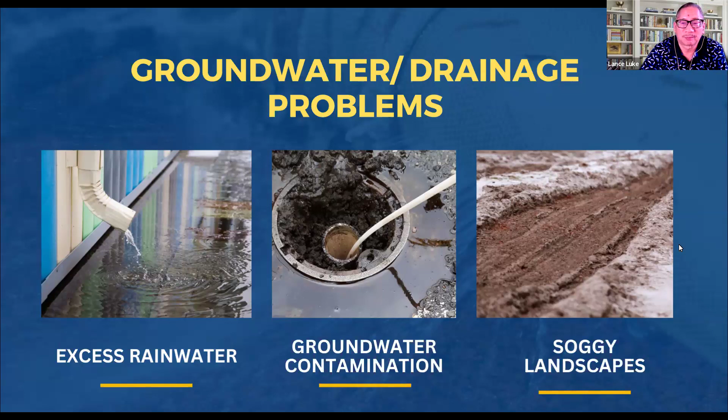Then excess water could contribute to foundation damage. If you always have water against the foundation, you could have cracks or erosion on concrete, or wood rot if it's wood, leading to mold or mildew. You could have insulation in the walls get wet, which is no good -- even if it dries out, it just doesn't function like new insulation. And then too much water, you have some soil erosion. When you have too much soil erosion under your house foundation, your house could be moving from that.

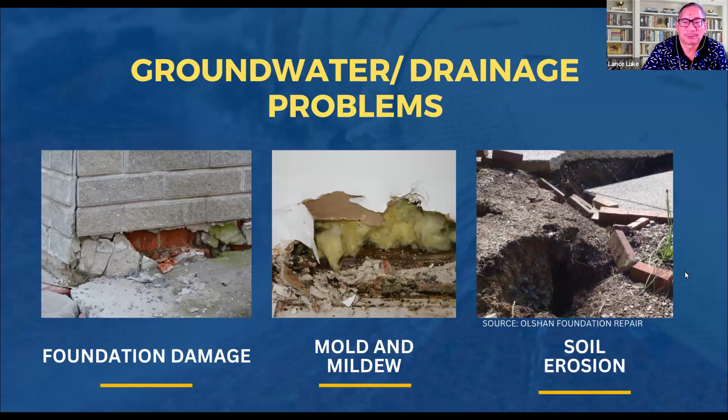Some more issues: flooding of roads, and then overflow off the road leads to basement flooding. Not too many houses have basements, but even if you don't have a basement, if you're still low to the ground, a house or building could be flooded. I know a lot of condo buildings where we had hurricanes and floods, their first floor lobby got flooded out.

And then you have water quality issues where you could have contamination of your drinking water, or contamination of streams or rivers, and these streams or rivers lead to the ocean. I'm talking about Hawaii here mainly. So in Hawaii, if the stream or the river is contaminated, guess what? It goes out into the ocean, and then part of the ocean gets contaminated.

But the situation is getting worse and worse. And then you have legal issues, regulatory compliance regarding groundwater drainage. That's why you cannot wash your car out on the road and let the water drain into the gutter, into the storm drain. Believe it or not, that's not allowed.

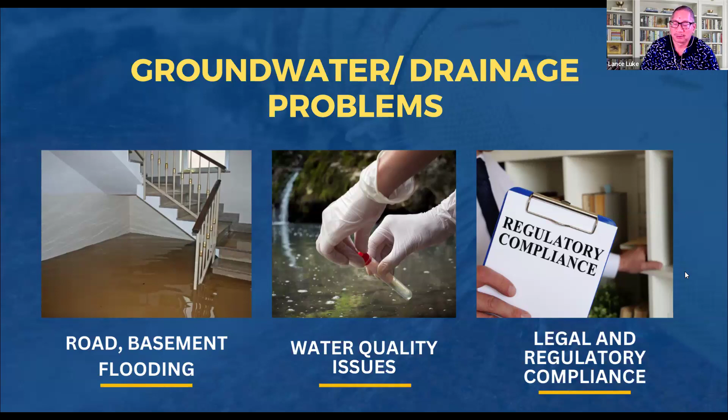Also, painting a building. The painting company cannot pressure wash the building and have all that excess water drain out into the gutter that leads into the storm drain. There's huge fines for that. So we're talking about environmental concerns.

And then let's talk about plumbing leaks. It's pretty common. You have pipe leaks. It could be a fixture that's leaking. It could be an appliance, such as a water heater, where it gets too old and starts corroding and develops these leaks. A water heater could be leaking for some time, a couple months or even a year, where it develops a slow leak, and then all of a sudden it turns into a huge leak.

That's a serious issue, especially if you're in a condo. Let's say you're on the 21st floor, and the guy above you doesn't replace his water heater and it starts leaking. You're gonna know pretty fast when you have water dripping down from your ceiling that there's a leak. That's why we always try to spread the word and tell people don't wait until it gets bad. If you see a lot of corrosion around your water heater or you see some water, have a plumber come out and check it. Most times he's going to recommend that you replace it because you cannot repair corrosion on a water heater.

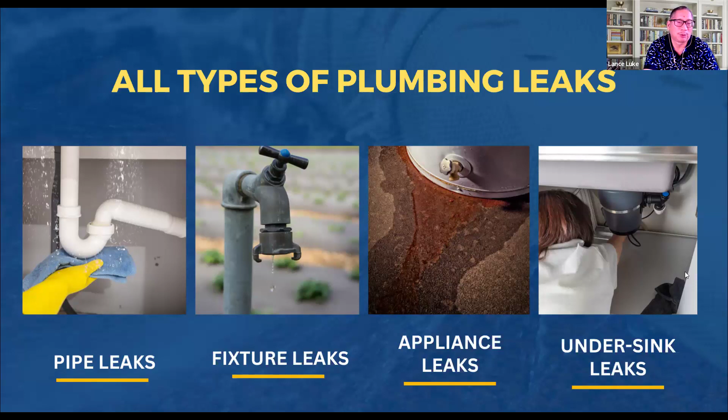There have been cases where in a high-rise condo, the guy down below says, 'Hey, I got water dripping,' and he knocks on the door of the condo unit above him, and the guy goes, 'Oh, there's no leak in my bathroom.' He doesn't know that because the pipe is inside the wall and it's not visible to the unit owner. So these are things to be aware of.

Some other types of plumbing leaks are sewer line leaks, which is not the best kind of leak. You could have a concrete foundation slab leak, and we say it's a slab leak, but it's actually not. It's water that's coming underneath the slab, the foundation slab, and going up into the slab and then appearing on the inside of the house. That is common when you have piping located underneath your house foundation.

So the difference between house construction: you have a concrete slab and then you have a raised foundation, and there's room under the house to crawl under there. There's also another type which is a basement foundation, but that's commonly on the mainland and not really in Hawaii. And then you have a roof leak, which is not a plumbing leak, but this is an exaggerated photo. And on the mainland, you have frozen pipes that crack or burst, because the water inside the pipe freezes. That's more of a mainland or country area that has freezing temperatures.

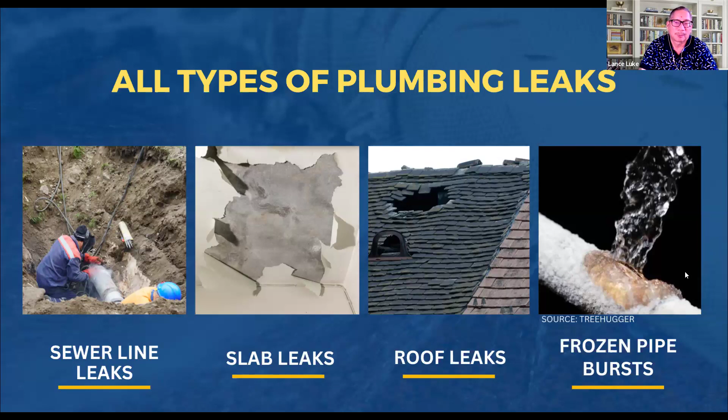That photo of a roof previously should be on this slide, but somehow it got mixed up. But roof leaks of various types: you got weather related, such as snow. We don't have too much of that in Hawaii. Aging, wear and tear on your roof, causing the roof to leak if you don't attend to it right away. You could have flashing issues and then also ice dams building up.

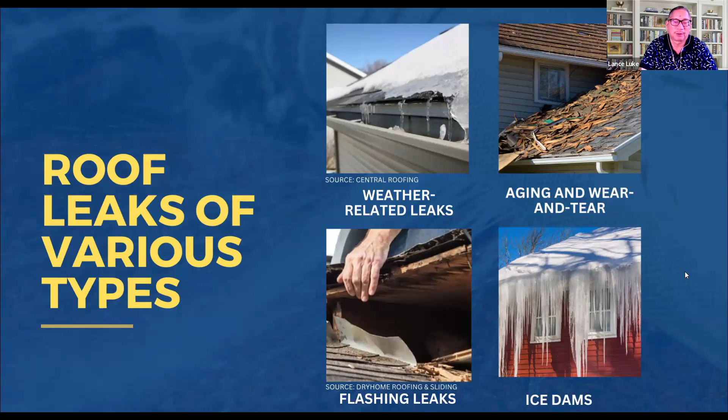So the key here is you want to get your roof fixed or inspected and don't wait until it starts leaking. If you get roofing contractors come to your place, it doesn't matter whether it's a house or you're living in a condo building. Contractor comes out and he can tell you, yeah, your roof is not performing as intended, and I think you should replace it or have it repaired. So you get an opinion from professionals. And sometimes with the opinion, the people don't listen, and then there's other issues that come to play.

In a commercial building or apartment building, most times the roof is flat, so you could have a floor drain on top of your roof that gets clogged. The objective is you've got to make sure your roof is inspected. In a condo building, you're not going to go up on the roof yourself, so you ask the building manager or resident manager when was the last time they checked the roof, and to report any problems. When they check it, they should fill out an inspection report and take pictures so we have documentary evidence of the inspection and any repairs needed.

If you live in a house or condo building, there may be skylights and exhaust vent leaks at your vent or skylight, common to single family houses and townhouses. A lot of townhouse buildings are actually condos and don't have flat roofs necessarily - they may have skylights and vents. You want to be sure the vents are all sealed at the base, the flashing. That's normally the area where it would be leaking.

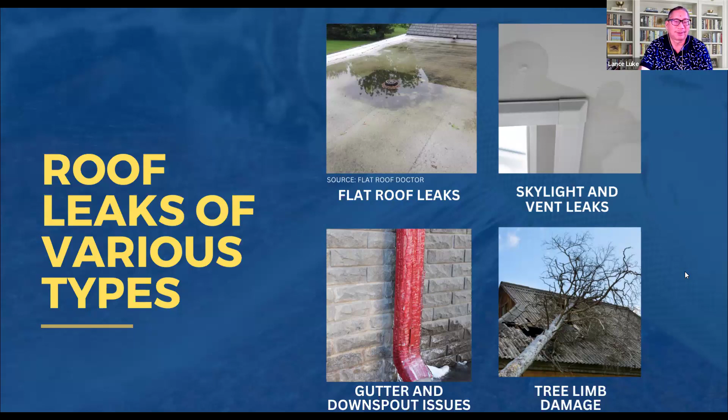And then you may have an act of God kind of thing, like a tree falling onto a roof. If the tree has been dead for a while and it's close to the house and you don't do anything about it, it could be an accident waiting to happen. That's where insurance may come in, but they may ask how long has this tree been here, how long has it been dead, and can't you see it's a 50-foot tree located 30 feet from your house - if it falls over, the tree is higher than the distance to your house. This is what happened, so they may say it's your own fault for not tending to the problem.

Let's talk about window leaks. I'm not talking about jalousie windows where if you leave it open rain can come in, or a sliding window left open when it rains with heavy wind - of course water can get in then.

We're talking about weather-related leaks during heavy rain and driving force winds that cause rain to blow sideways. But that's part of the problem. The other problem is maybe the window has poor caulking, improper installation, condensation issues. If the building is old, aging, deteriorated, with wood frames, and the caulking's missing, water can easily get in at the joint between the window frame and the wall.

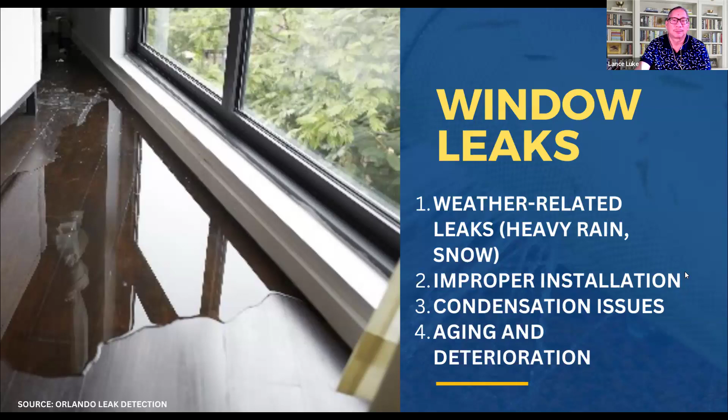Some more window leaks: sealant failure. You have this rubber gasket that goes around the window, located between the glass and the window frame. If that material gets warped or so old that it shrinks, it doesn't serve its purpose, so that's also a situation where water can get in. It's pretty obvious when we see that, or sometimes it's missing.

I've seen some houses where the gasket is totally missing, and I asked what happened to it. They said it was lifting up and too hard to clean so they just removed it. I said, do you know what the purpose was? You've got to put it back or get somebody to fix it. So sealant failure, caulking, gaskets, frame and sill damage - you want to make sure everything's watertight.

Leaks around your window - sometimes on the mainland they have these wells around windows. Just think about this: if you're outside your house with a garden hose shooting water directly at your window and the wall, do you think water can get in? If yes, then it's problematic. Now that's a single family house - can you imagine on a high-rise condo? It's the same concept.

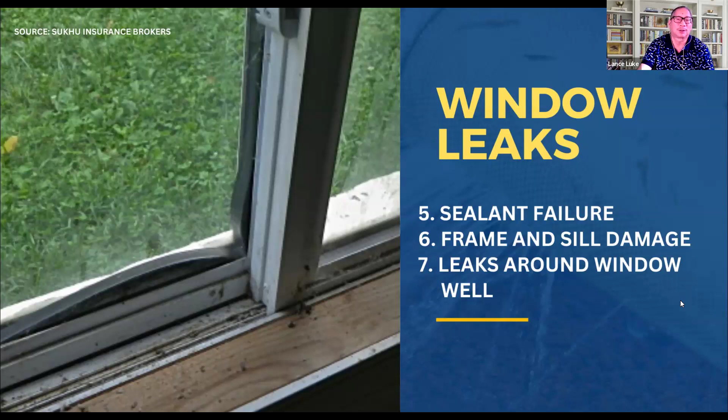Okay, so it gets kind of technical, but if it needs to be done to discover where the leaks are, then that's fine too.

How about exterior wall leaks? Weather-related leaks, heavy rain, wind, pounding hurricane force winds where the wind is so strong it actually causes the rain to blow sideways. So if you're outside holding an umbrella, you have no protection because the rain's coming in sideways. So that's what's happening at your house or building wall. And if you don't have paint to protect it or waterproofing, guess what? The water is going to get in.

It doesn't matter if your wall is made out of concrete, CMU block, wood, stucco material, or anything like that - water can still get in. On an exterior wall, the construction method uses flashing and caulking. So if the flashing is not done correctly or if it's worn away, that could be another condition for a leak. Cracked or damaged masonry, that's like hollow tile blocks or bricks, and sometimes the grouting cracks or just falls off. Now you have an open space there where water can get in.

And then faulty siding. In the past, there was wood siding that wasn't real wood - it was ground up, fabricated pieces of wood with other kind of chemical makeup, and it was fibrous. All those manufacturers got sued because their siding material used to get so warped and expanded when it was wet, and it basically disintegrated. It was like a higher level cardboard, so to speak. The brand name is like Masonite siding, LP, Louisiana Pacific, that type. It was all man-made - I would call it wood type siding.

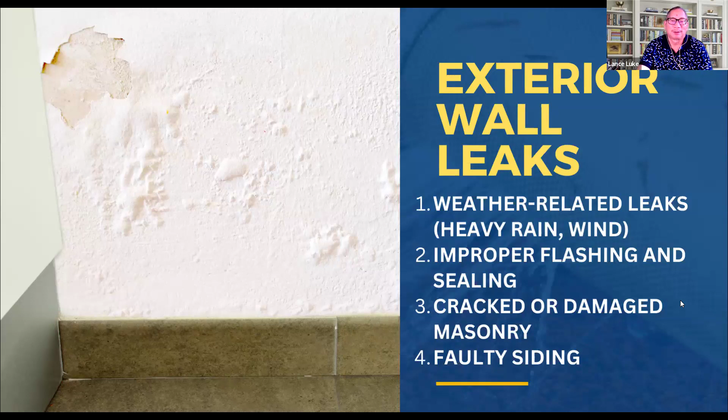After that came your stucco type siding, and then your EIFS, exterior insulation finish system, which is basically upgraded stucco kind of material. But once they install that and you have cracks in it, that's another issue where water can get in. So the more sophisticated the construction building material industry, the more problematic there could be.

So some more on exterior wall leaks: foundation leaks, as I mentioned, insulation issues, roof to wall connection or junction leaks. You might not see it because it's up on your roof, but that's another area that could be problematic. And then caulking and sealant failures. There's a lot of times where I've seen leaks and there's nothing wrong with the wall - the water had come in from failed caulking at the joint between the first floor and the second floor, or your roof and your wall, or anytime you have dissimilar materials, that's an area that could fail in the future. So that's the kind of things we look for.

Dissimilar building materials - you have like a metal window frame connected to wood siding. So we look at that joint, it needs to be caulked.

And mold, the 4-letter word. Anytime you have water into your house, and it could be where you live - an apartment, single family house, duplex, high-rise condo, low-rise condo, townhouse, any type of living area that you live in - if you have water coming from the outside wall, foundation, or roof, or a plumbing leak, it could be a contributing factor to mold.

Now, mold doesn't grow on concrete or brick that becomes dangerous. It grows on cellulose material. And what is that? It's material that's made from wood. So mold can grow on wood. Mold can grow on drywall because it's cellulose type of material. Mold can grow on carpet too - on the back of the carpet, you have this grid that looks like little strings of rope.

I've seen mold growing on that, but the more dangerous type is when it's inside your double wall of drywall. So I've seen mold grow on wood, bare wood, or even painted wood, mold on drywall, or you cut a hole in the drywall and you look on the back side of it and there's mold.

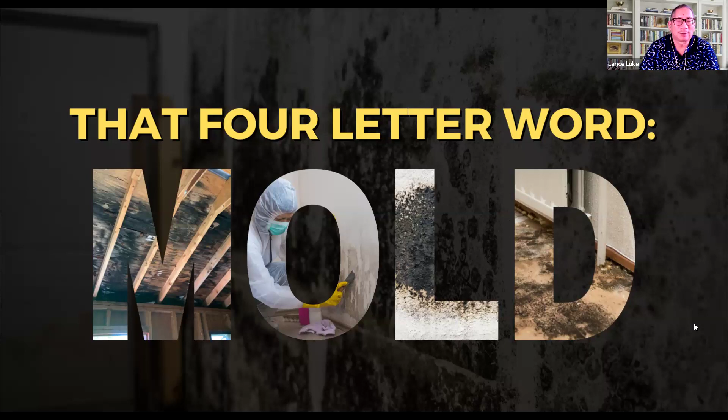So basically, that's the gist of my presentation today. And let's see what else we have here.

Conclusion from the building expert: the takeaway is make sure you don't have any water leaks, and if you do, attend to it right away.

A water leak could be from the foundation coming up from the ground, it could be rain, could be an overflow from a stream, any type of water situation from a flood to a broken pipe. All these fall under a water incident or a leak.

So just pay attention to these things and then hire experts to help you. I know it costs money, but it's money well spent.